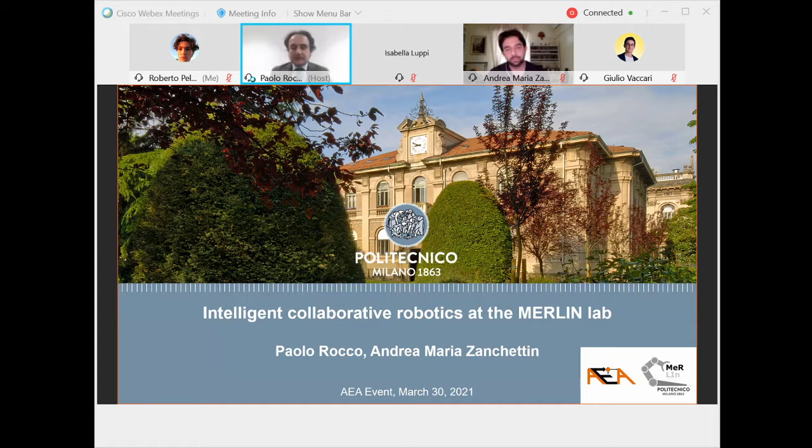So the topic today is intelligent collaborative robotics at the MERLIN lab. So let me see. Okay, so I will start this conversation with some figures on automation, whether it is a risk or an opportunity.

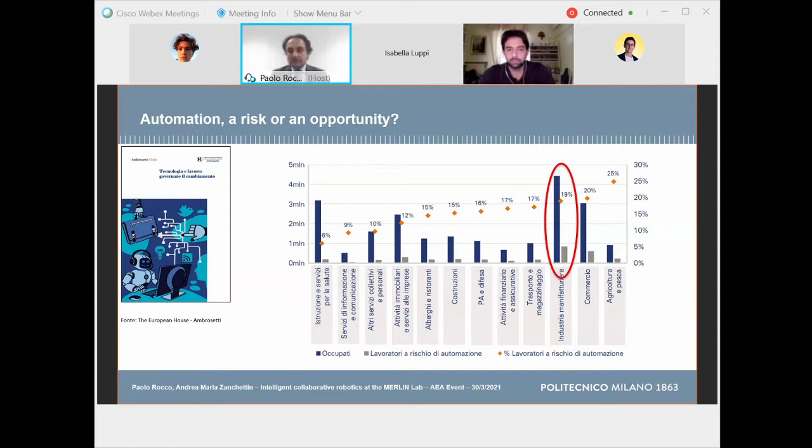You can see that the higher the blue bar, the more people are working in this area, and of course industrial manufacturing is the highest one. About 20% of this large share of people who work in this specific area are, so to say, exposed to a risk of being substituted by automation.

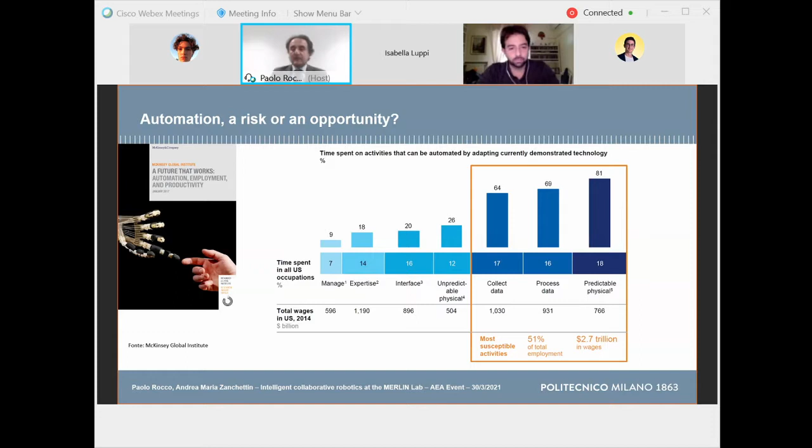In another study published a few years ago by McKinsey Global Institute, they tried to analyze all the working activities of people and classify them in terms of risk of being substituted by automation. The activities that undergo higher risk are collect data, process data, and predictable physical activity, meaning doing over and over the same activity. So if you work in collecting data, processing data, or predictable physical activity, you need to be a little bit worried.

So what is the conclusion? Will workers completely disappear from the factories? Are we going in some years to the model of the black light factory where only machines work and no human will be around?

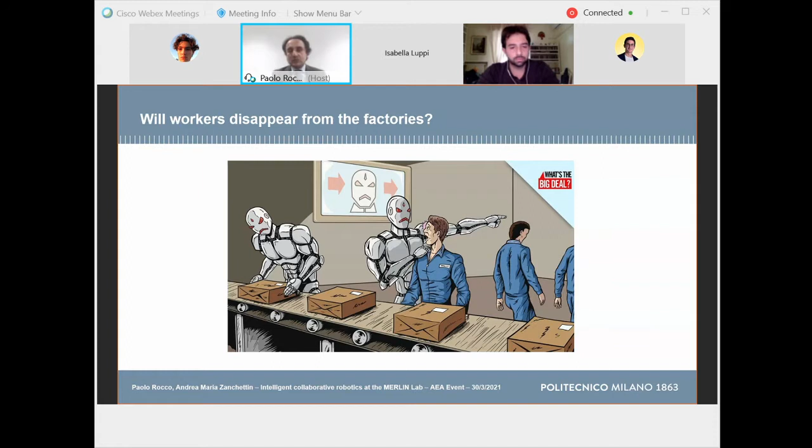Well, this is not necessary, because there are new paradigms, and one of these paradigms is when human and robot work together in a productive task. This is exactly what we call today collaborative robotics, or collaborative automation. It's a new paradigm in industry, and we want today to explain to you what this is about, and how in the MERLIN lab we are studying it and what our current research is in this field.

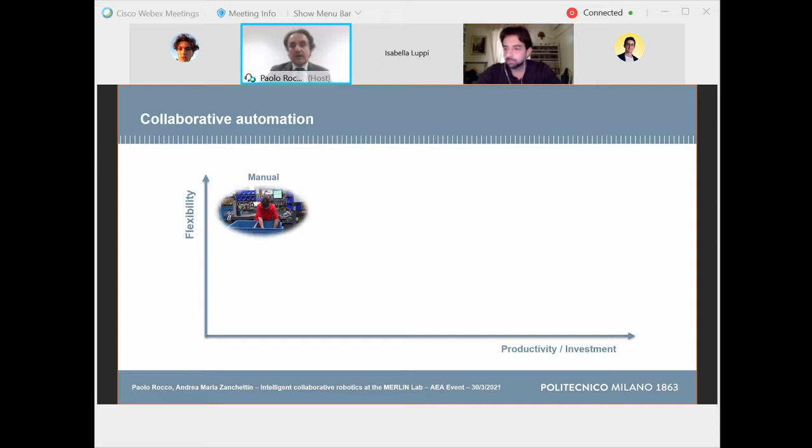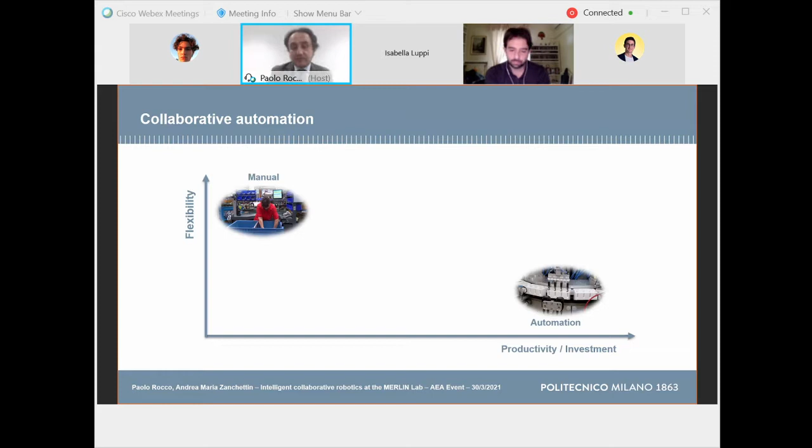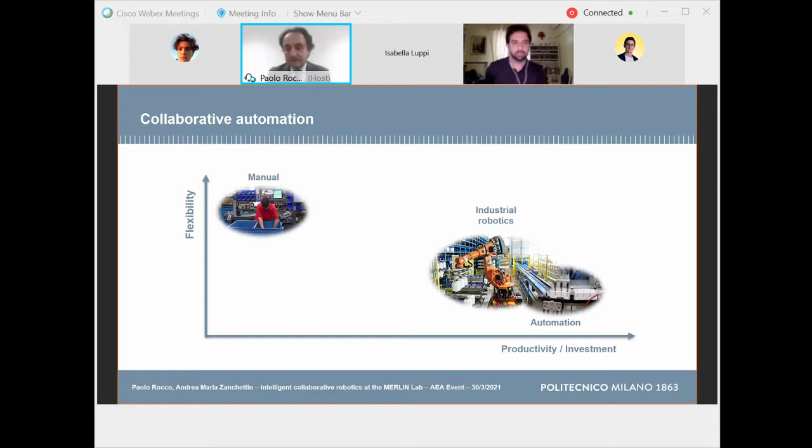On the other hand, you can have hard automation, machines that are conceived to do only a certain kind of product, so they are highly productive but not particularly flexible. You can have industrial robotics as a first step to be a little bit more flexible, while maybe a little less productive. An industrial robot might be a little bit less fast than a tailored automation plant.

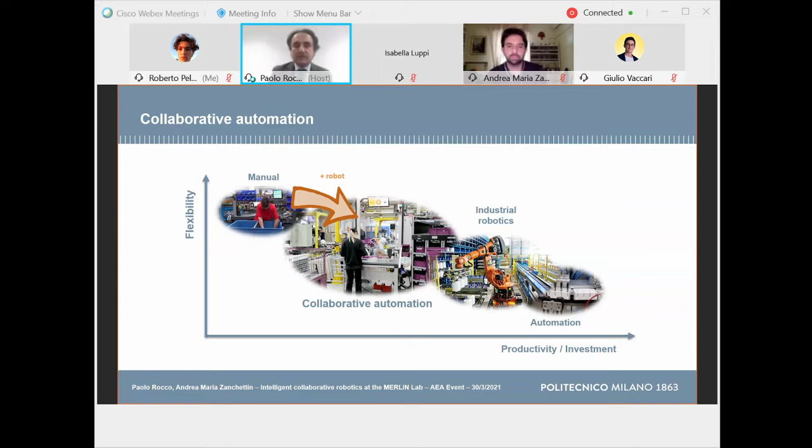But in between, you can have this collaborative automation where the human and the robot once again work together to perform a certain task. With this collaborative automation, you can get a good trade-off between flexibility and productivity. The principle is this one.

Suppose that you have activities that can be organized into activities that have low added value, so easy and cheap to automate, easy for a machine to do, and activities with high added value, or difficult or costly to automate. Think, for example, of activities that the robot is not yet so good at, like manipulating deformable objects, cables, and so on.

So suppose that for these activities you have a completely manual process, but you want to evolve from this and introduce a robot into your production plant. What you can do is assign the activities with low added value to the robot, while keeping the activities with high added value for the human. This way you get a team that gets the best of the two agents. And you can do this safely, as we will see, without any infrastructure for safety.

So the paradigm is actually an evolving one. You can have different situations when it comes to cooperation, to interaction between human and robot. You can have just coexistence, where human and robot do not actually share the same workspace. They each work in their own workspace, and occasionally the human has to access the workspace of the robot, maybe to pick something or to give material to the robot to work on.

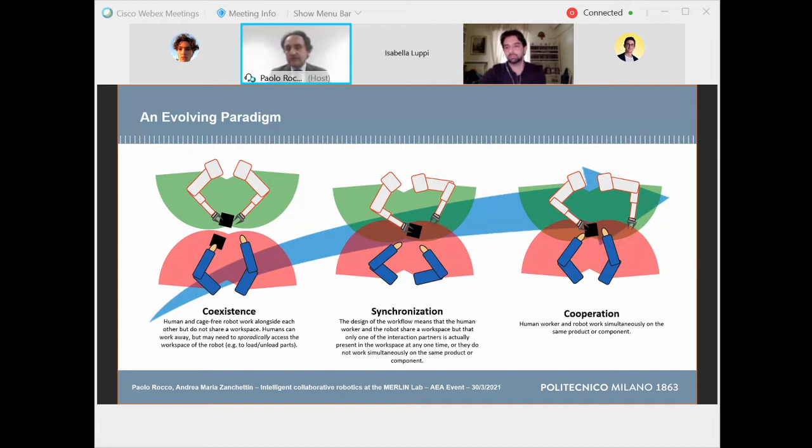Another paradigm might be synchronization, where the working spaces of the two agents have a part in common where they can both work, but not simultaneously. So either the human or the robot works in the shared workspace, synchronizing with each other. Cooperation is the most extreme way of interacting between human and robot, where they both share the same workspace and can actually work together on the same task, with maybe also some physical interaction between the two agents.

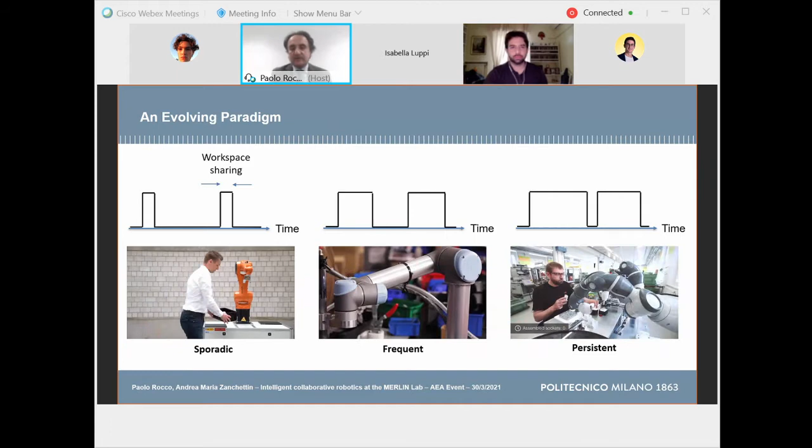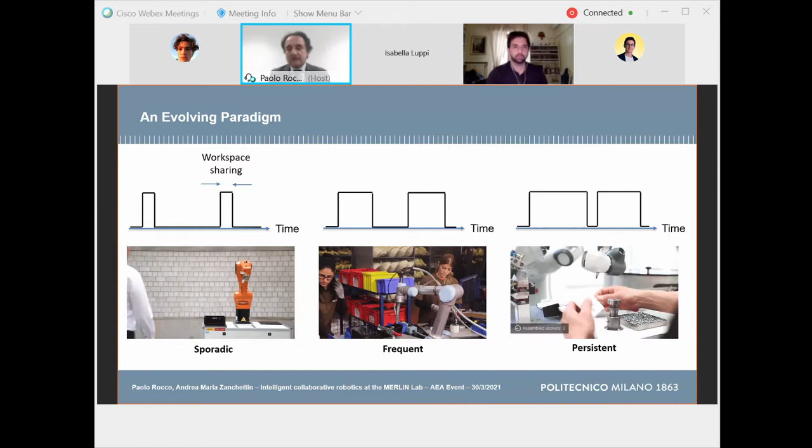This evolving paradigm can be seen in this picture: on the leftmost part the sporadic access, in the middle the frequent access, where the human and the robot work in different workspaces but have frequent interactions, and the persistent interaction on the rightmost clip, where you can see the human and the robot, in that case the Yumi robot by ABB, working together in a production task, in particular to manufacture electrical circuits.

Of course, when you have a machine and a human, you need to be careful about safety. I will not give you a lecture about safety, it's a topic of university courses. I just wanted to give you a couple of examples on how we dealt with safety in our research a few years ago.

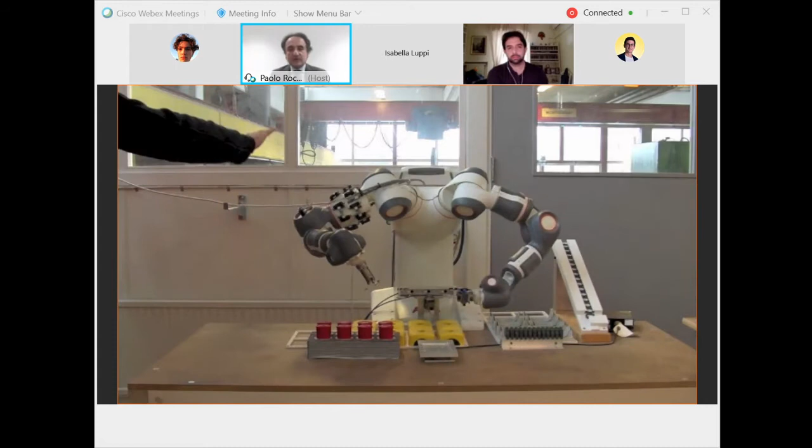The first one is this. You can see that this is similar to the Yumi robot, actually a predecessor of it. It was called Frida, a prototype from ABB, and we worked with ABB corporate research at the time, more or less 10 years ago or 8 years ago.

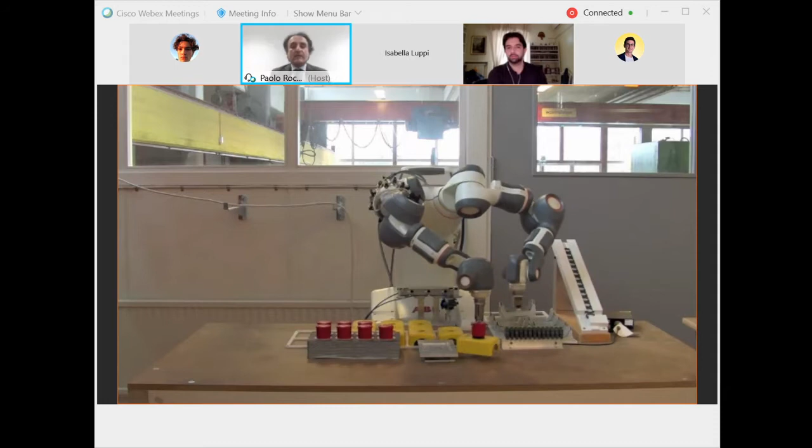In this experiment, there is this sensor made by students, formed by a shell made with 3D printing, on which there are some distance sensors. The robot is aware of the fact that a human is around and keeps doing its production process, although the human is there. Technically speaking, it uses its redundancy to make evasive motion in the so-called null space of the task, meaning it enjoys all the richness of its articulation. That's a first way to cope with safety, having a sensor mounted on the robot itself.

Another paradigm is this one, where you have a robot doing a repetitive action, and then you will see a former student of ours come into the scene. They are perceived by the device up here, that is a 3D camera, and the speed of the robot is modulated as a function of the distance between the human and the robot.

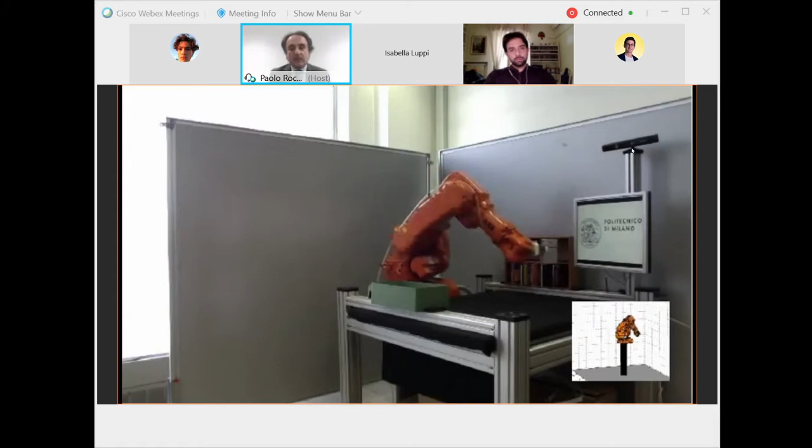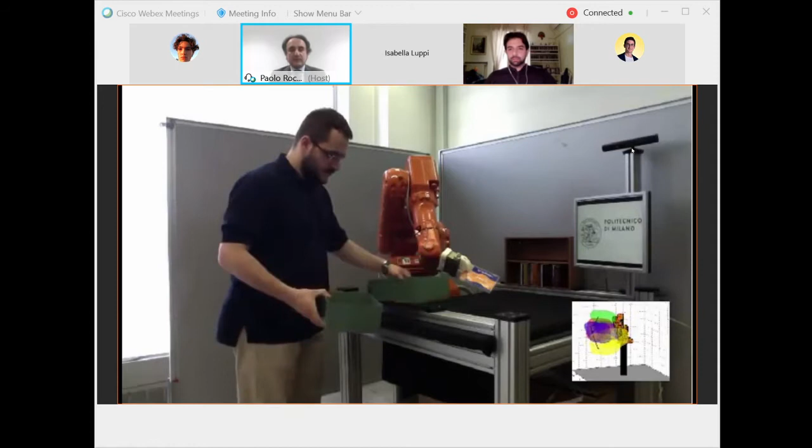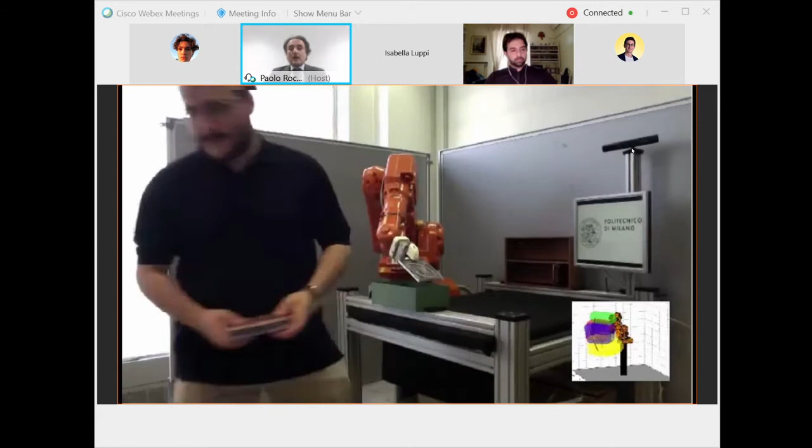This is completely compliant with one of the safety standards dictated by the ISO, the International Standard Organization for Safety, called speed and separation monitoring, meaning the speed of the robot must always be such that it can come to a full stop depending on the distance perceived between the human and the robot. This is the way we can deal with safety, and it is very easy to transfer to a real production facility.

In both of these clips, we have seen that the human is more or less a disturbance for the robot. There is no interaction, it's just a coexistence of the human and the robot. You can do more, of course, with robots, and one thing you can do is help workers.

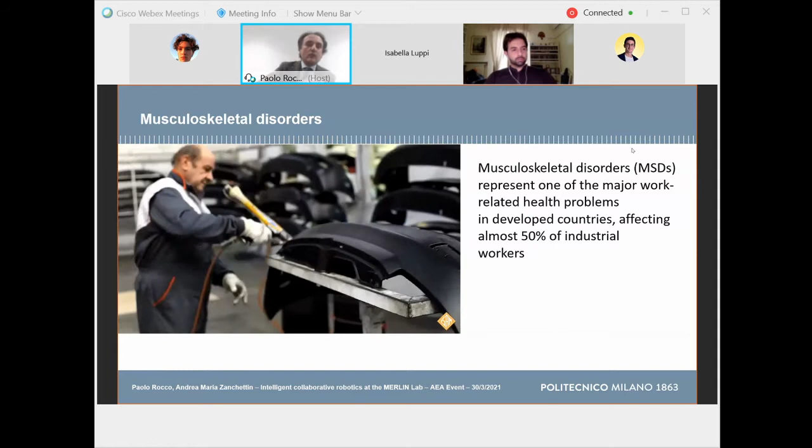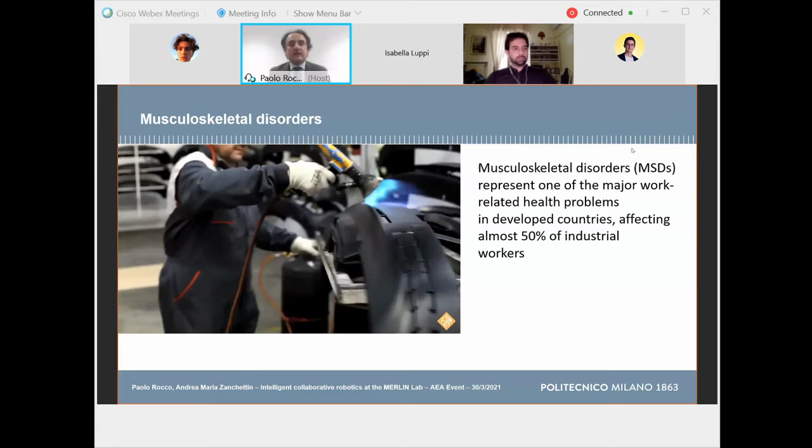Take a look at this video where you can see a worker doing an operation called priming on this bumper of a car, and you can think of this worker doing this over and over for his whole day shift. Of course, it is challenging for the upper part of his body in terms of exposure to musculoskeletal disorders, which is one of the big headaches for people that run productive plants. The costs related to musculoskeletal disorders are extremely relevant — I won't go into detail figures, but keep in mind this is one of the most important problems to be solved.

So, in order to have a more productive facility where humans are involved, the idea we had is: why can't we use robots to help humans? How can we do this? We can do this by having the robot carry, in that specific case, the bumper of the car, so the human can do this operation without having to make big motions with the arm, avoiding stress on the musculoskeletal apparatus.

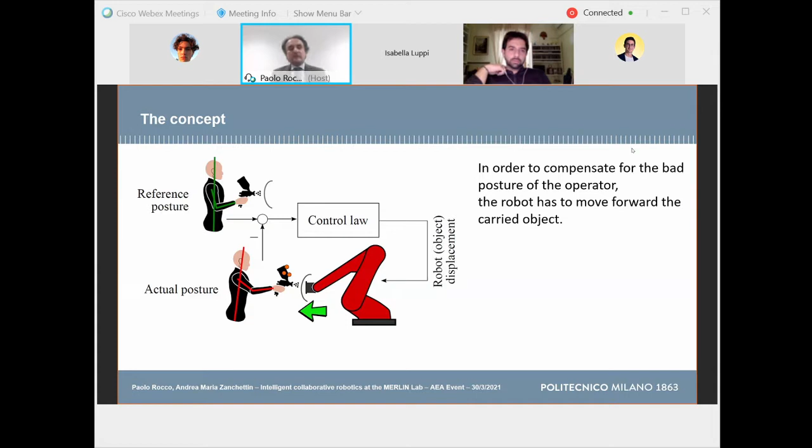So the idea is quite simple. You have a camera that frames the human, and thanks to some study in ergonomics, we know that to do a certain task, the upper part of the human body has to be arranged in a certain way. In case the reference posture of the human is different from the actual posture as perceived by a 3D camera, we use something familiar to automation engineering students: feedback. We use feedback and move the robot in such a way that it forces the human to get back to the reference posture.

That is exemplified in this video, where you can see that the robot moves the bumper in a way that the human does not have to move.

You just have to make micro movements of the hand, and you can see this device with these three balls that are here just to facilitate the task to the vision system. And so the robot, you can see, moves the bumper.

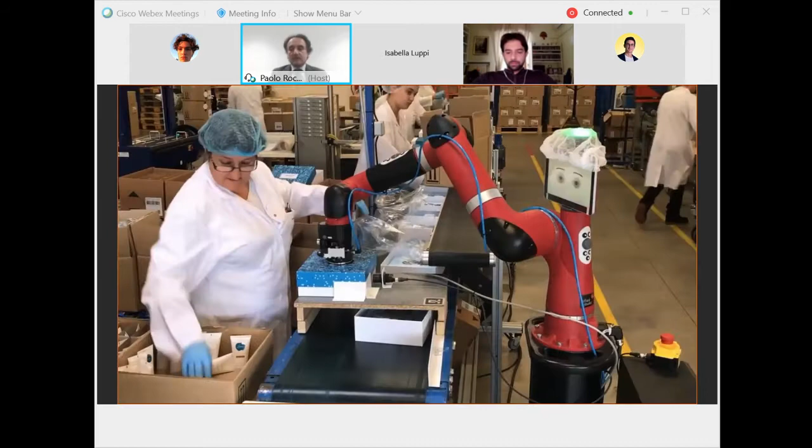So the robot can be a good helper to the human, but when you want the robot to actually work alongside the human in production tasks, so the human does something and the robot does something else, you can think of this fact. The human can see and understand what the robot is doing, but the vice versa is not true. So don't be fooled by these nice eyes - this robot does not see, does not understand what the human is doing. So to say, the communication is asymmetric.

Take a look at what happens here. This is a very repetitive task, you can see. And everything works fine. But here you can see that the worker has some problems and she slowed down. Synchronization is lost. What will happen then, we will never know, because the video runs back again. There is clearly a fault in the synchronization.

So what can we do to improve the situation? As I mentioned before, collaboration is kind of asymmetric. The human sees and understands what the robot is doing. On the other hand, the robot has no clue of the work of the human. So if we don't do anything more, the robot is a pre-programmed machine and it does what the programmer told the robot to do. Is this point clear?

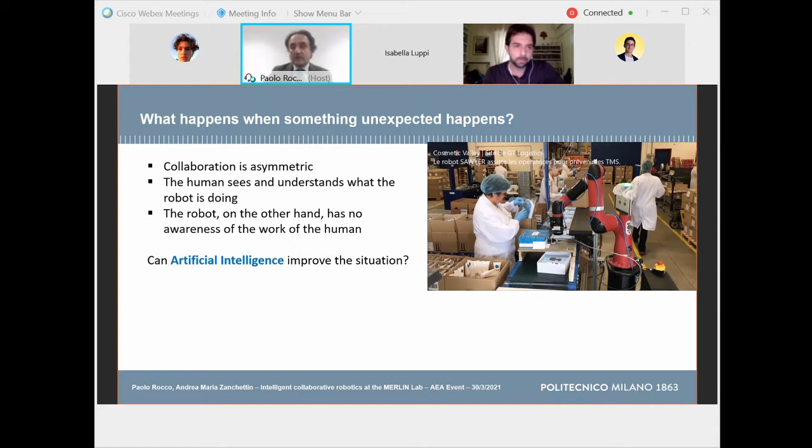So the idea that we have is whether artificial intelligence can help us improve the situation, and in particular artificial intelligence combined with vision and cognitive vision. The first problem that we faced was this.

Suppose that the human can do several actions, so we have a discrete set of actions, and what we want to do is, thanks to some vision system, infer the ongoing activity of the human. So we want to understand, out of a possible set of activities, which is the one the human is actually doing in this precise moment. And we do this by assigning probabilities to each action and updating the probability associated to each action.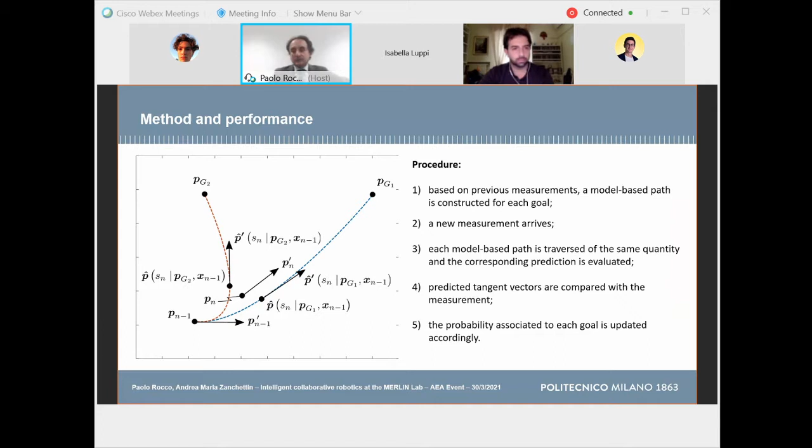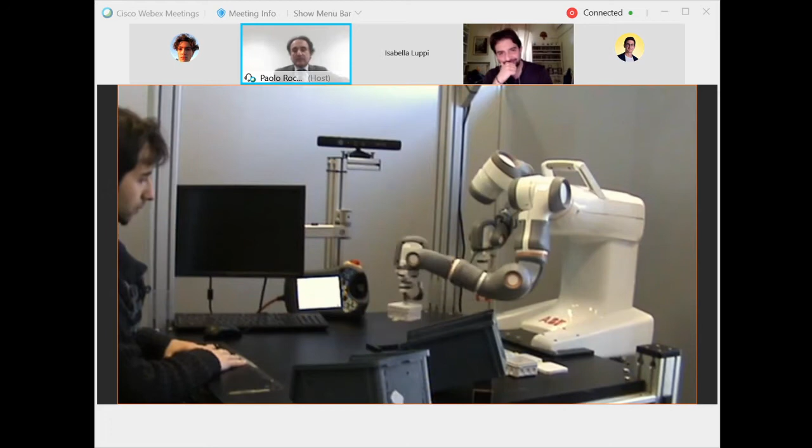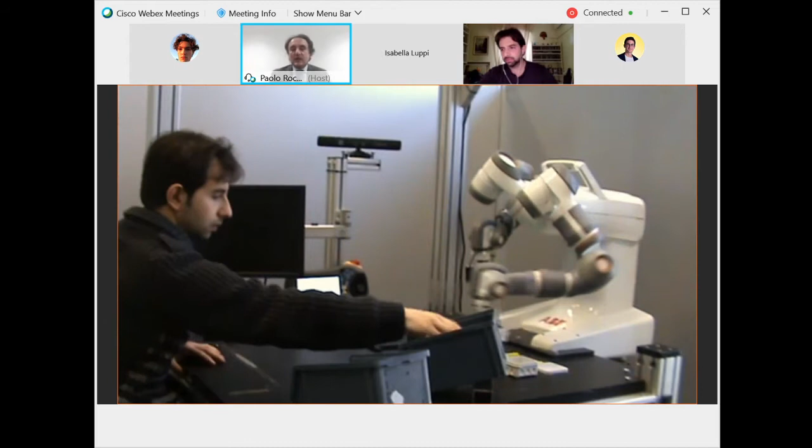This is actually shown in this video, where you can see maybe a little bit younger Professor Zanchettin, who is performing in this picture. You can see that the robot understood the action made by the human. In that case, the human was picking the empty box, and the robot picks the top, and vice versa. So the collaboration is so smooth, so natural, thanks to the fact that the robot is understanding what the human is doing - it's able to understand, out of the possible actions, in that case only two, which one the human is doing.

Just let me move one step further, then I will give the floor to Professor Zanchettin. So the next thing that you can do is this one. Again, the robot can understand the human. But one thing that might even improve the situation is when the human is actually aware of the cognitive activity of the robot, meaning that the human might be assured when he or she feels that the robot has understood.

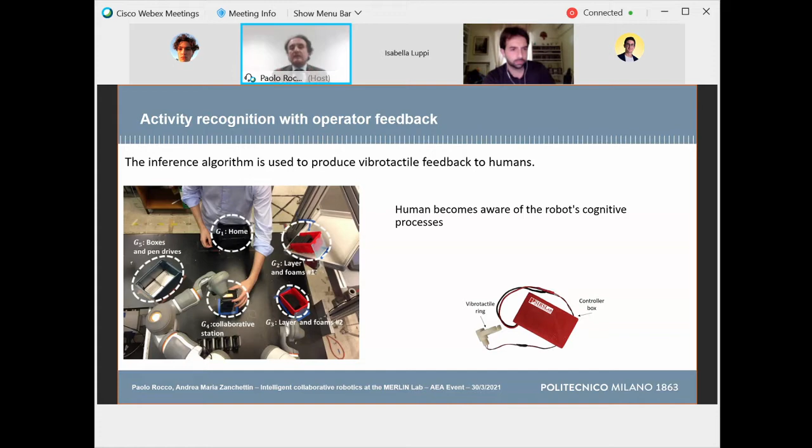And so we pushed this idea, and together with another group from the University of Siena, Italy, used a vibrotactile ring mounted on one finger of the operator, like a smartwatch. So you get a vibration when something happens, and that something is when the current action of the human is understood.

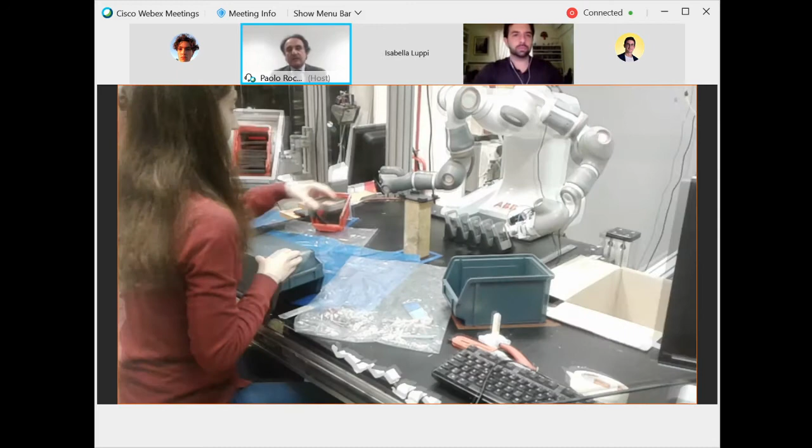This is exemplified by this video, where you can see our PhD student, Costanza Messeri, performing this operation, an assembly of a pen drive. In a moment you'll see the vibrotactile ring vibrate, because the robot has understood the action she was doing, and actually the robot complemented it with the following action. And here again, the vibrotactile ring vibrated.

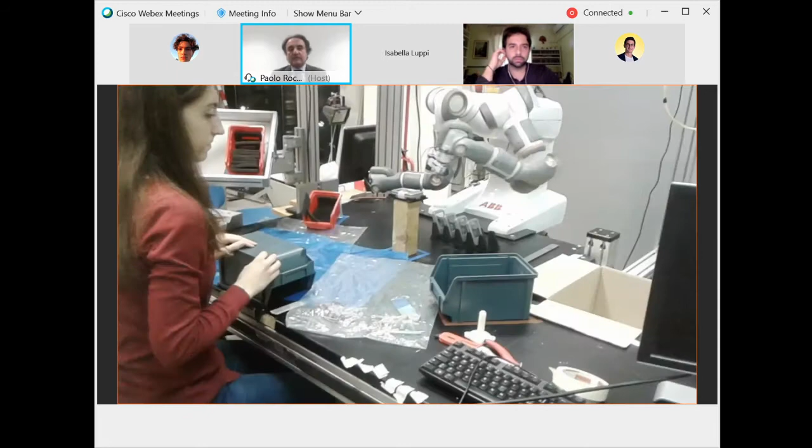So now we have a robot that can understand what the human is currently doing. The human, on the other hand, is aware of the fact that the robot understands what the human is doing. What can we do more?

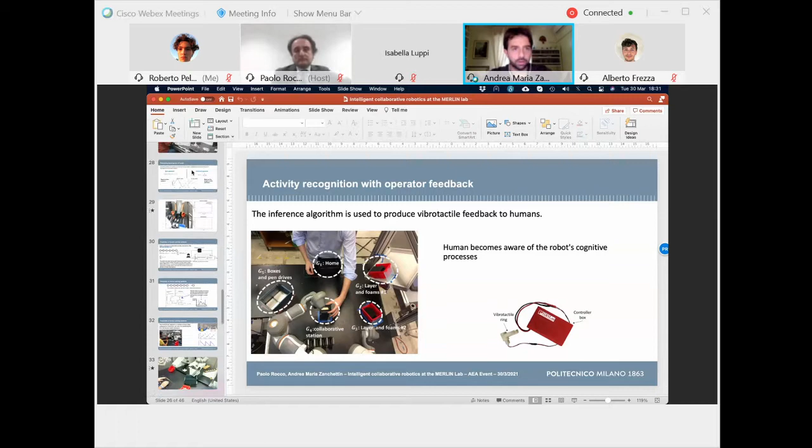Okay, thanks. So what you have seen so far is that a robot can actually infer what the human is doing, but the actions we've seen were so limited in time that any other approaches or applications are not doable with this kind of approach.

So let's assume we have a longer action, and we need to synchronize the motion or activity of the robot with that of the human at the end of this action. For example, an action lasting 2 minutes, during which the robot can do whatever is needed without taking care of the human. But you want to be very precise at the end of those 2 minutes, because the human at that specific time instant actually needs the robot to continue.

So you want to predict exactly when this help provided by the robot will happen in the future, and so you want to estimate the overall duration of an action that takes a bit longer than just a few seconds. So the thing you can do is monitor all the actions the human has performed until now, and collect statistics, for example.

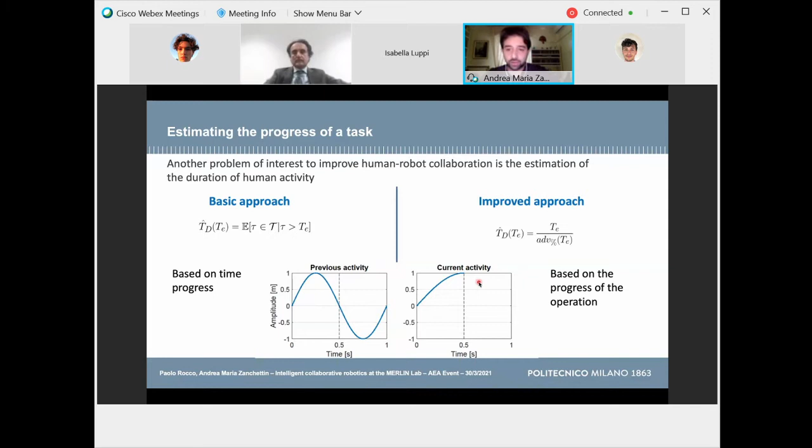So this is what we did, and this is one example of it. What you see here on top is our guessed duration, 32 seconds, 33 seconds. And this is the activity running.

So we are monitoring these former students with a camera, and you can clearly identify colored markers on the gloves. Here you see the remaining time, so it's 16, 15 seconds less. And here you see our prediction, which is the red one. So it's our prediction of the overall duration of this activity versus the real duration, which we can only know at the end of the task.

As soon as we are at 50% or more of the execution time of the action, we are actually able to predict very well the overall duration, whilst the average-based approach is highly inaccurate in this case, which is this blue one, the average of previous executions.

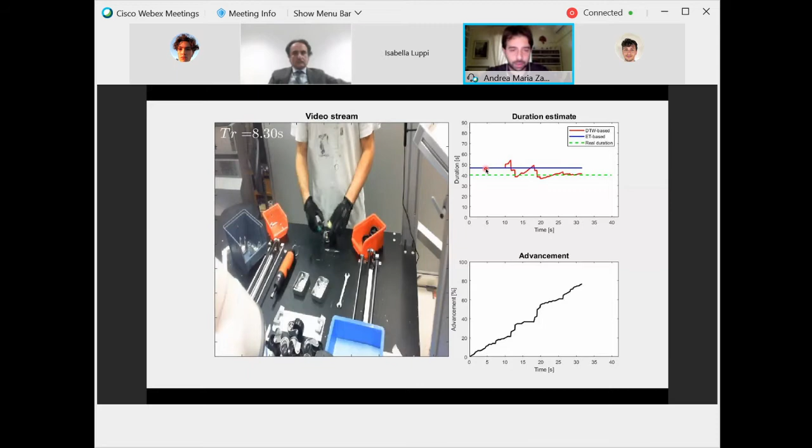So now we have this information saying how long this activity will last more. And the motivation why we started working on this is because at the end we want to synchronize the task of the human with the task of the robot. So we developed another algorithm at a higher level that tries to predict not just the overall duration of the current activity, but also the duration of further activities that the human will perform.

So as we started at the beginning, just classifying the activities. Assume the human is doing activity 1, which is, say, screwing. Then activity 1, which is screwing. Then activity 3, which is hammering. Then again activity 1, which is screwing again. So you see this string of symbols, which is 1, 3, 1, 2, 1 in our example here. And what you want to guess is the next one.

We are trying to guess the next one. Of course, we can compute a distribution of probabilities of seeing action 1, a distribution of probability of seeing action 2, and so on, everything with respect to time. So after all, we have a distribution saying how long we have to wait before seeing activity number 5, for example.

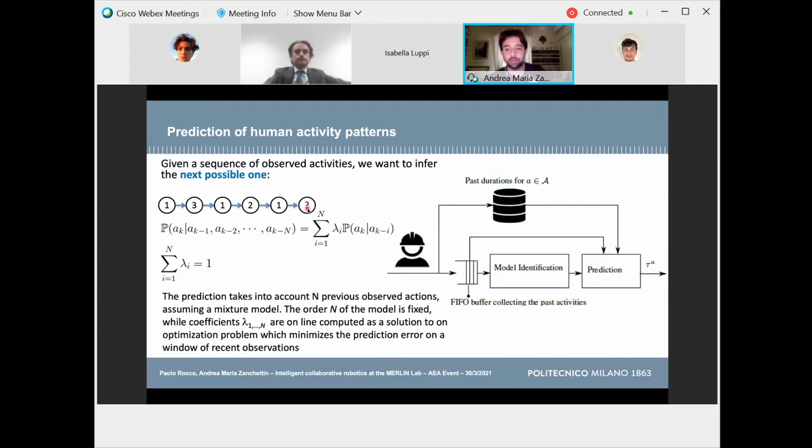This can be useful information to be sent to the robot. Assume that activity number 4 in this example is the one that needs some synchronization between the human and the robot. So at the current instant, we want to infer when activity 4 will show up again. We have this probability distribution with respect to time, saying that it is likely that activity 4 will show up again in 30 seconds.

Now, when the robot has this information, this is translated into: okay, I can do my stuff, and I have 30 seconds to complete, because after those 30 seconds, the human will need help. So that's the reasoning the robot can do internally within the controller to schedule the corresponding activities.

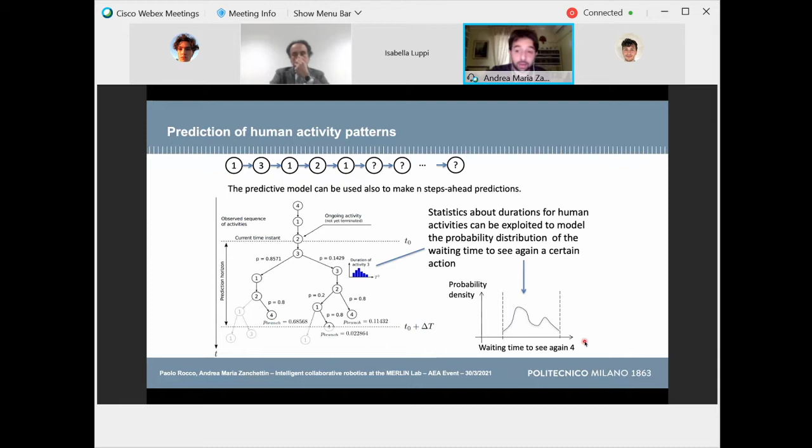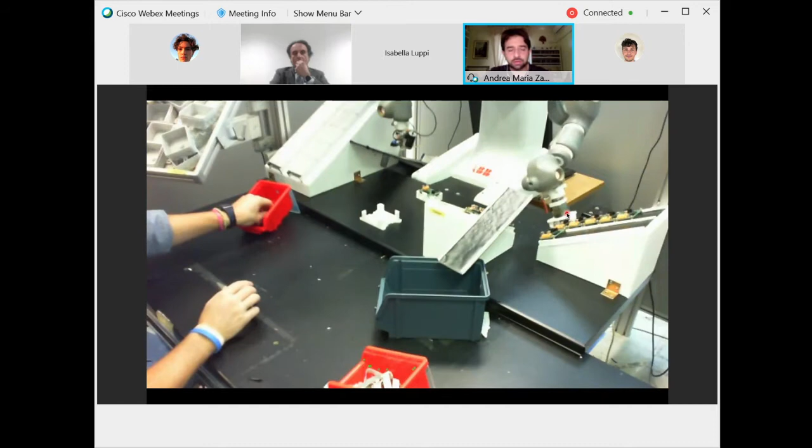And this is exactly what we have done, as you see here in this demonstration. You see that they can go in parallel, but at a certain point, the human actually needs the robot, or vice versa, so this is exactly where they have to synchronize. You see that our former student here put a box while the robot was putting the circuit board inside the box, and then they are doing something together in a collaborative manner.

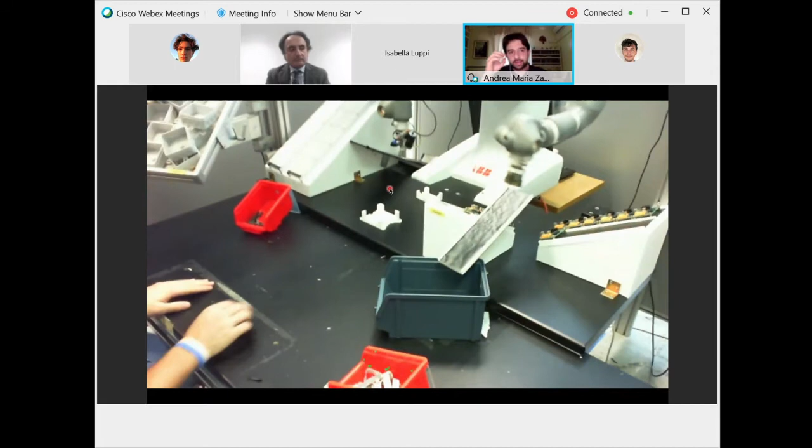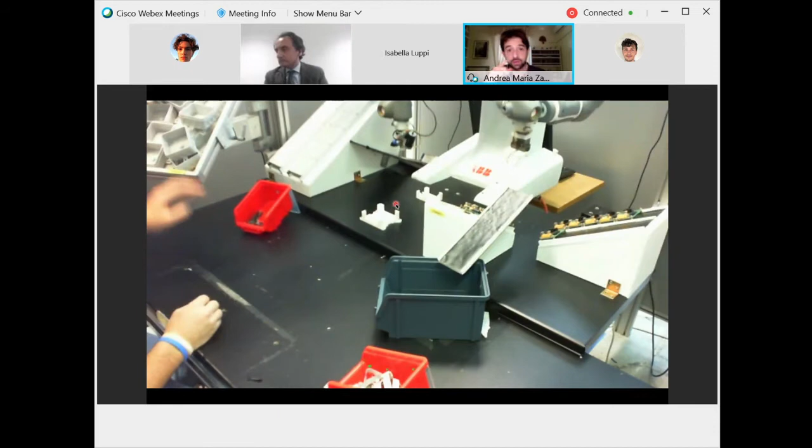So that exactly is what we want to predict: when exactly in time the human will put the box on the table in front of the robot. This is not happening right now, but we are continuously predicting when this activity will show up. And the robot is actually able to reason on that and synchronize with the human accordingly.

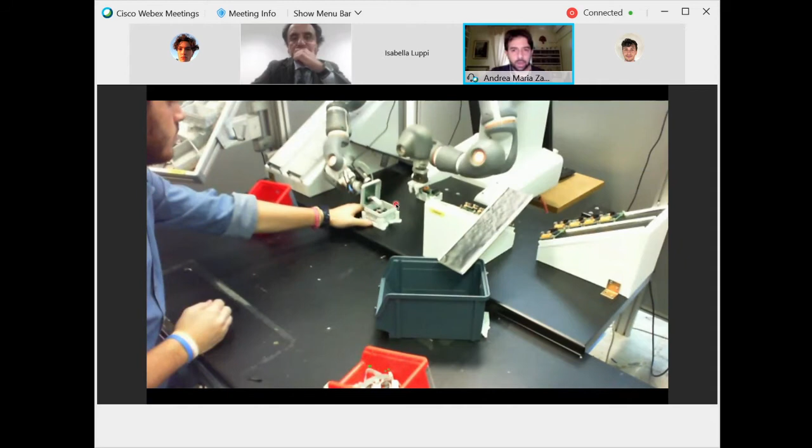Then finally, what we did is something even more complicated: a scheduling approach. Well, scheduling means what should I do now? What should I do next? And what should I do after next?

Assume that the robot now has to select within a number of jobs that are in charge of the robot. The robot can start job number 1, job number 2, job number 3, and so on. And we have collected a lot of information coming from the human. So the natural question is, which is the task or job that is most suitable to be executed now by the robot, within the ones that are available.

So instead of just having some operational research algorithm that is optimizing for the job assignment to the robot, we try to bring the human inside. We do some kind of scheduling for the robot activity that is human-centric. The human is governing the collaborative station, and the robot is adapting to the human. It's not the human that is part of the system to be optimized.

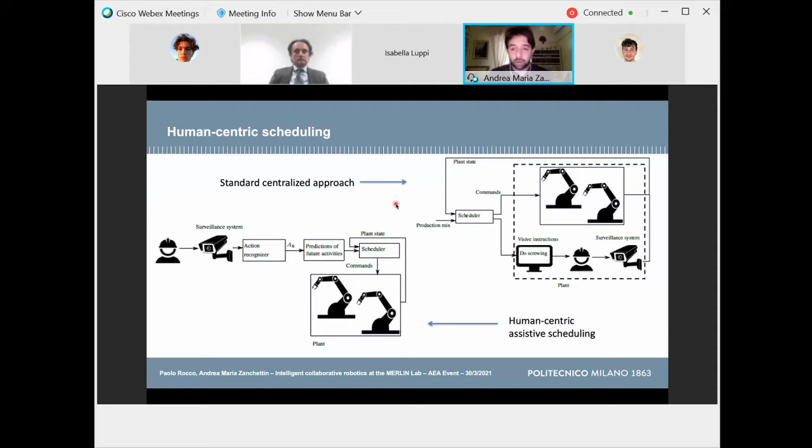So the human is free to select whatever activity is best to be executed, and the robot will adapt by observing the behavior of the human. That is something we can call intelligent collaborative robotics, which is human-centric from this aspect. And this is exactly some technicalities that we optimize based on observation of the human's behavior.

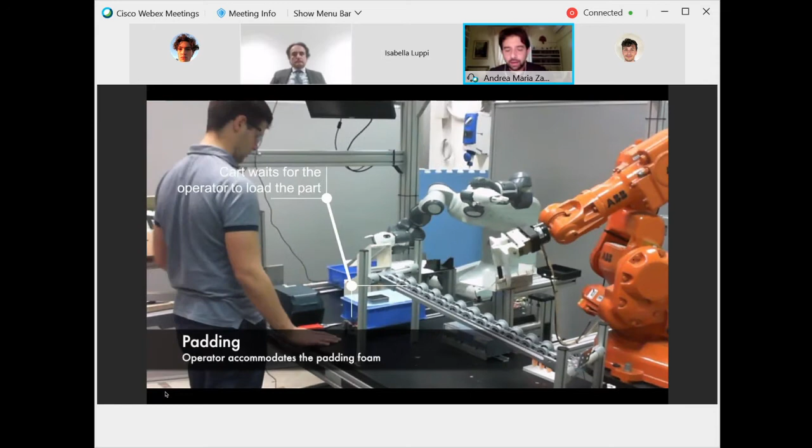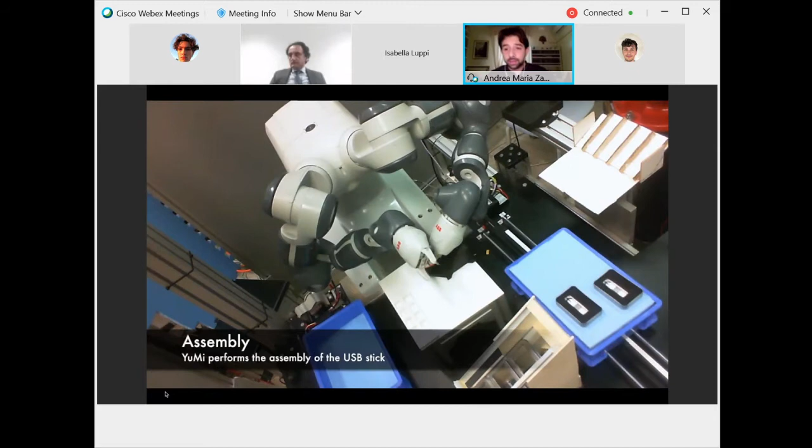I will skip that in favor of this video, which is probably more informative. So we see now a very complicated arrangement of one human and actually many robots. Here you see two robots, but actually there are more than two—there's a dual arm robot, and there are those two carts going back and forth.

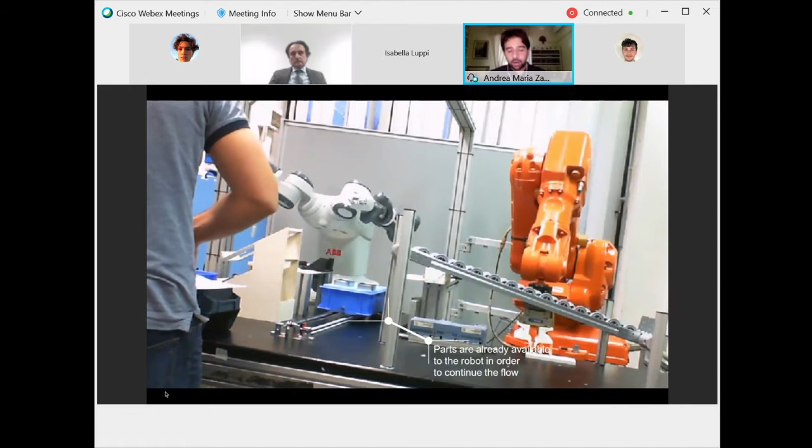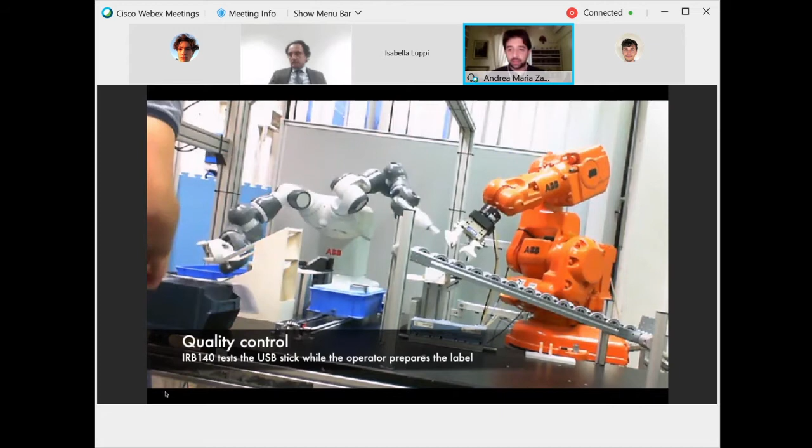They're not going back and forth randomly. We're just observing when the human needs to put something in the cart to ship that to the robot. And we coordinate the motion of those two carts as well as those two robots, depending on what the human is doing, and also the percentage of advancement and everything we have seen so far.

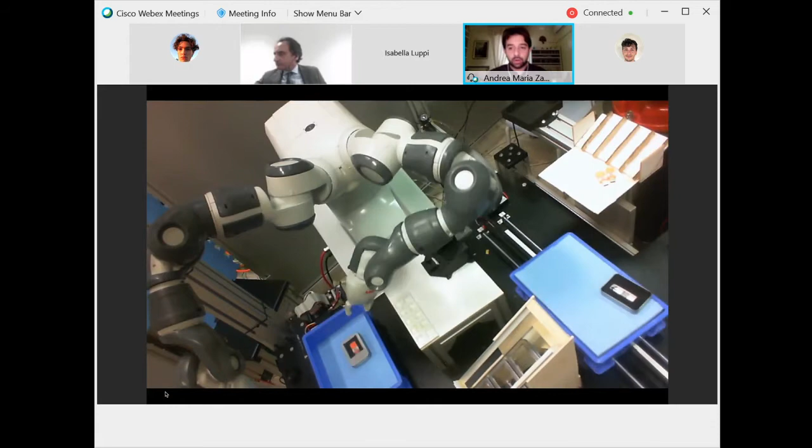So you see that this is a very fluid cooperation between agents, but they're not all humans. They can cooperate with each other in a very fluid manner because the robots are actually aware of what the human is doing, and they coordinate with respect to what the human is doing thanks to this intelligent, artificial intelligence layer that we have put in the middle between the human and the robot to allow the robots to understand humans.

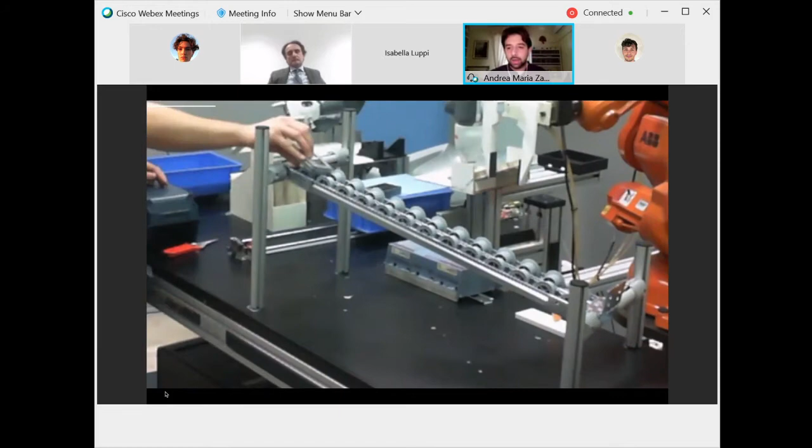And you see that there are a lot of assembly tasks, including also some storing and packaging at the end of the line that is done with this big orange robot.

Last but not least, I would like to mention what we are doing so far. We're trying to mix what we know from traditional industrial automation. Traditional automation, I hope you are aware, is 100% more or less based on PLCs. And when you have a PLC, it means you have signals coming from the field.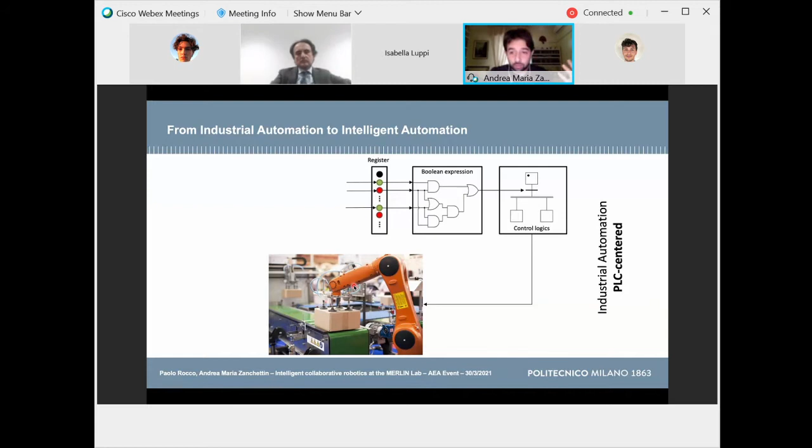But assume that now the thing you want to control is a collaborative station—the one with the robot and a human operator working side by side and somehow coordinating with respect to each other. So there is something we have to put here. While it's evident that the robot can send digital signals to the PLC, what kind of signals can the human send? Well, thanks to artificial intelligence, we can observe the scene and understand what's going on.

So here we have a human that is tracked and monitored with a camera, for example, and here we can clearly recognize that there is an instrument or tool that the human is using. We have an artificial intelligence layer containing all the so-called digital twins, the internal models of reality—this is the world model that we keep maintained. So in this case, the artificial intelligence can say that the human operator is using a wrench, which is this tool here.

This information is either true or false. In this case, it's true according to the current information. This Boolean or digital information can be sent back to the PLC level, allowing the robot to decide what to do next, for example, in the same scenario we saw before. So we're mixing industrial automation, which is PLC-centered, with intelligent automation, powered by AI. We think this is the approach to better coordinate humans and robots at the shop floor.

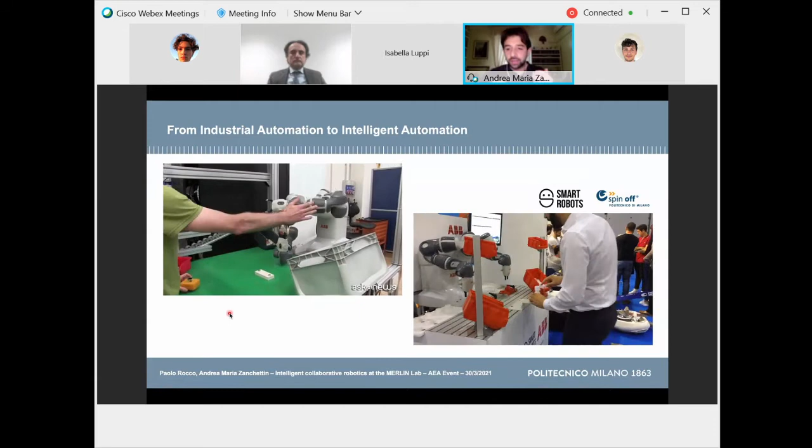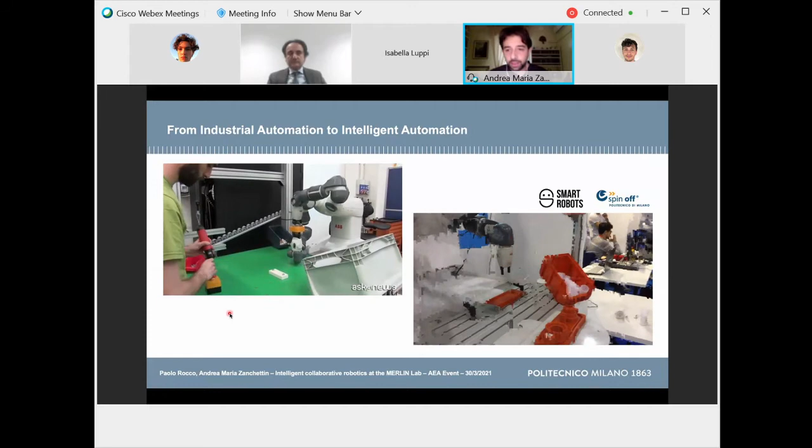In this right-hand side demonstration, taken from the last fair we had, in October or November 2019, the Maker Faire in Rome, the robot is monitoring what the human is doing, using exactly the same principles. This is actually synchronizing the task with the human. Now the robot is taking this work part, but it waits for the human to free the area before actually proceeding further.

I think that was the last slide before the final part of this presentation. This is actually the team. You see here the two of us and all the PhD students and researchers working in the lab. And of course, we have a lot of master students—something like 50 presently active master students working in the lab.

It would have been too crowded to play soccer with 50 students, so we just put 12 of us. We have one more, one extra player in the field right now. So thank you very much. We'll leave the stage again to Professor Rocco.

Thank you, Andrea, Zanchettin. Now I will try to do something difficult—switch to another device and try to give you a live view of the lab. Maybe Andrea, in the meanwhile, say something.

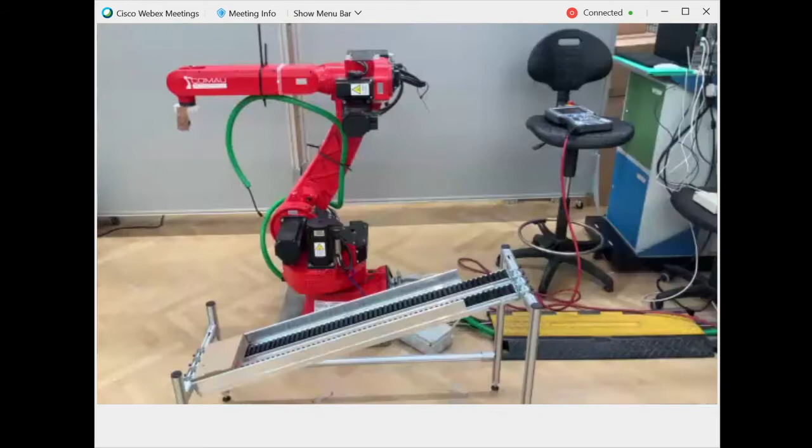The first robot you can see here is the Comau robot. This is a 6 degrees of freedom robot, for those of you who understand what that means. Now it's actually set up for a demo. Andrea, can you tell a little bit about this demo? Yeah, it's more or less the evolution of what you've seen for the speed and separation monitoring—so it's basically all about safety.

If you can raise the camera a little bit, there's a Kinect on top, on the left—you see there's this Kinect camera looking at the scene. We're trying to further go on with the research regarding safety, so we want to maintain a separation distance between the human and the robot that is as big as the velocity of the robot is. So the closer the robot is to the human, the slower the speed should be. That's the key idea.

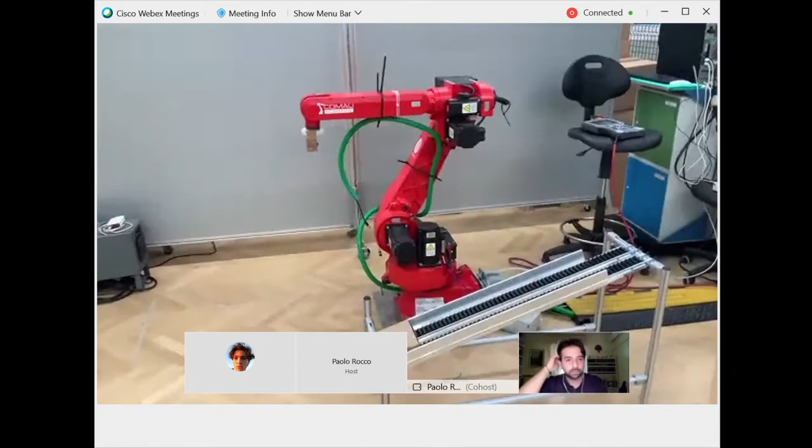The demonstration is basically a logistics task, which is a palletization of boxes. With this robot, we also did some other experiments that have nothing to do with human-robot cooperation. For example, we recently made a project with Brembo to do the deburring with force control of some of their calipers. So that is the newest robot—it's a collaborative robot.

It is from a Doosan company, Korean, one of the best collaborative robots in the market. It has been installed last week, so it's brand new, and we will use it for some projects. I cannot go into details here because they're kind of confidential, but it's up and running.

Now I can move to the collaborative robotics area. That is a 6 degrees of freedom robot from ABB, called IRB 140, used for several experiments. In this case, you have this handle, and for those who understand what it means, it also has a force sensor, because it is used to make experiments on advanced manual guidance of the robot.

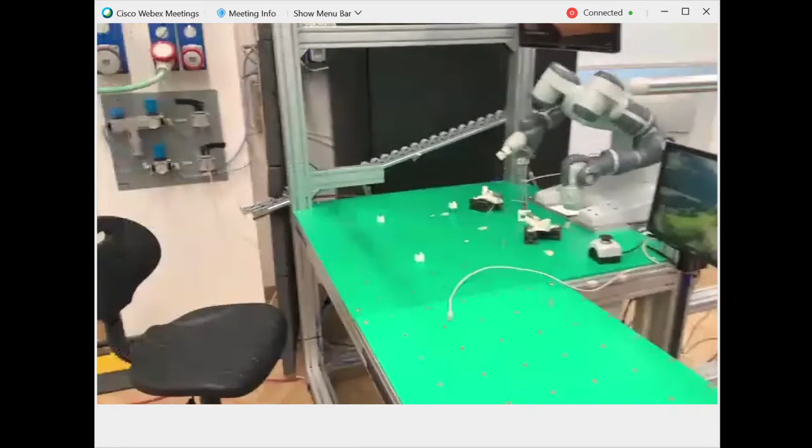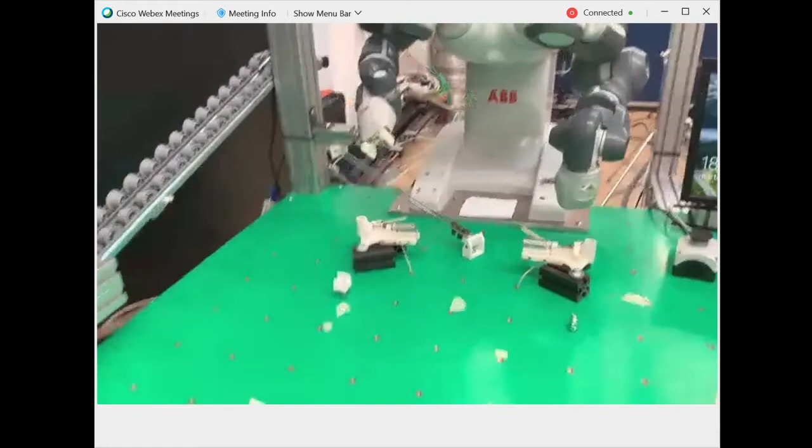And here you can see the YuMi robot from ABB. I'm not sure now what experiment it's supposed to do here, because it changes depending on the project. But anyway, this is the dual arm robot by ABB, and we use it together with that device.

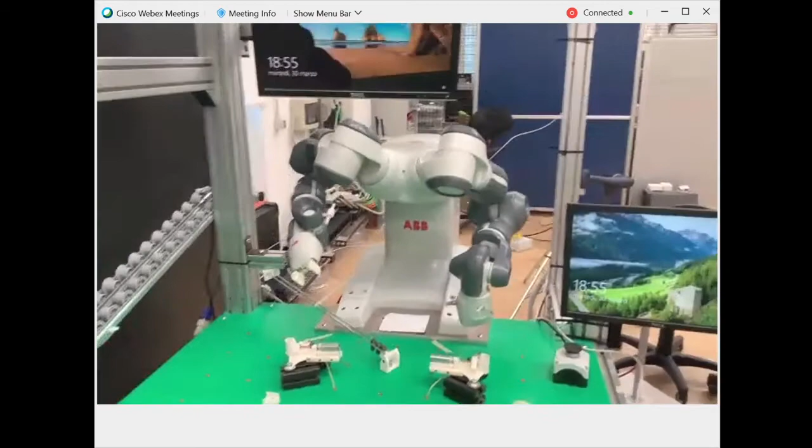You can see it, it is called Smart Robots, a device actually produced and marketed by a company also called Smart Robots. That is a company that is a spin-off of this lab, meaning it was founded by myself and Zanchettin and an industrial partner a few years ago, because that is a process that sometimes happens when there are good ideas in a research lab that are ready to be transferred to the market.

Don't know if Andrea, you want to comment about that? No, I just can comment on the demonstration that is running there.

So you have seen this camera, Smart Robots, and what you see here is part of the setup used for this demonstration. We are aiming at assembling a braking system for motorcycles, and this is part of the setup used for this purpose. So the human and the robot are actually cooperating, and thanks to the system, we are telling the robot what the human is doing - whether it's screwing or using the nut runner - and the robot can adapt its workflow based on this information.

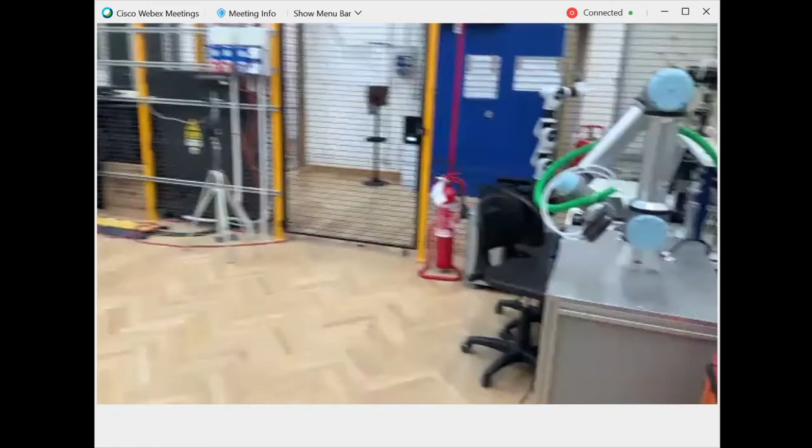And the last things are this universal robot, a very famous collaborative robot. It is not actually owned by our lab, it is owned by a company called Camozzi. Maybe we can talk about this project later. With Camozzi, we have a very ambitious project.

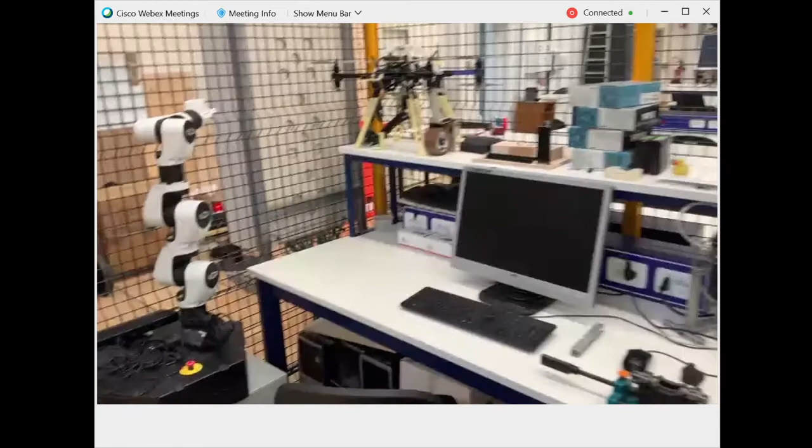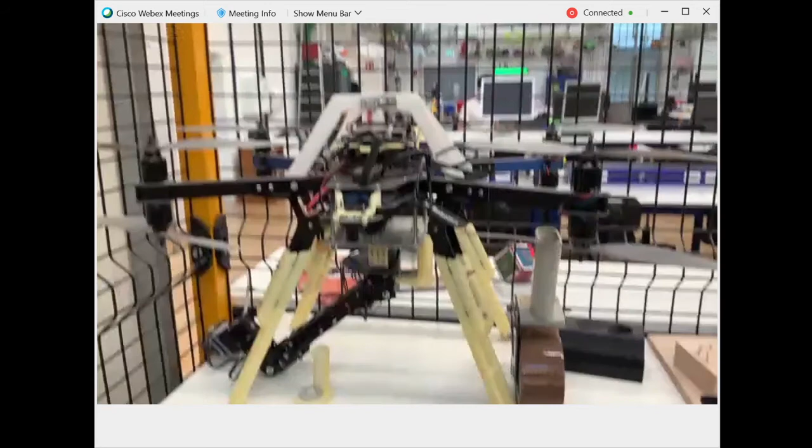We want to set up an entire production line mixed between humans and robots. This robot is here, but is supposed to be in a new facility that the Camozzi company is preparing, not so distant from here. And this is more or less what we have. We also have an educational robot here from Comau, called e.DO, and an old kind of device that we built - an aerial manipulator made up of a quadcopter and a small robotic arm.

That's it for the live presentation of the lab. So I will now go back to my laptop. Andrea, if you want to start answering any questions.

Yeah, there is already one. Isabella, please can you let me know whether I can start answering questions? Yes, if there's someone who wants to speak, you can just write it in the chat, and we'll let you speak.

Okay, and meanwhile, I can read and answer the first question from Giuseppe Longo: are there any emergency procedures to preserve human safety? Giuseppe is thinking about situations in which collaborative arms have some faults and go against human tasks during operation. So, of course, there are norms and prescriptions, and there is one specifically for collaborative applications.

Every robot that can potentially work with humans, including the orange and the red one which we can call industrial robots, are actually capable of working with humans. Some of those are also able to hit the human without transferring too much energy, and so those are the robots we can call collaborative robots - lightweight, possibly covered by padding material, so they can hit the human without actually hurting them because they are so lightweight.